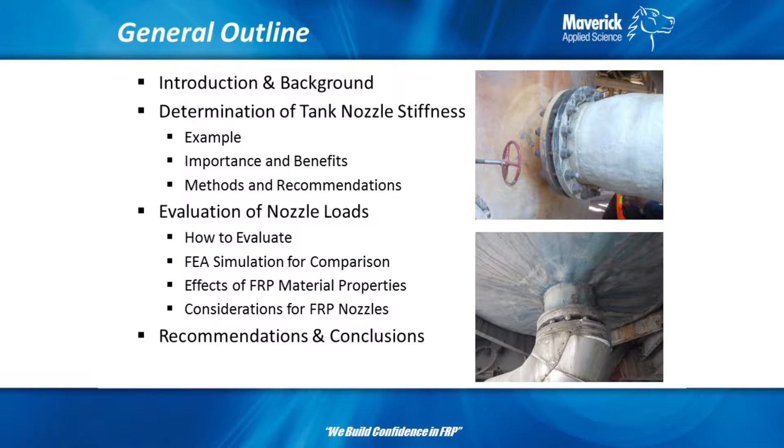So some of the background. Currently in RTP1, it has in the design section for sustained loads, it says the tank design must consider loads imposed by piping. Okay, well, that's good in theory. I can promise you it's poorly done in practice, chiefly because it is very rare that the tank manufacturer and the pipe manufacturer are the same person.

It does happen, but as I mentioned yesterday, basically the tank designer wants to go up to the end of their nozzle flange and say nothing is imposed on my tank. The piping designer goes up to the tank and says, I don't care about the tank, this is where my anchor point is. So there's a discontinuity there, just in how this is evaluated, because truthfully nothing is rigid. We'll talk a little bit about that as we go on.

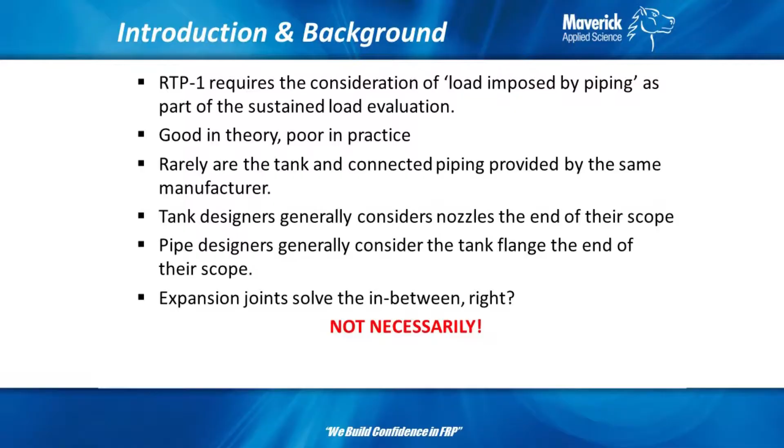You know, the common misconception is, well, let's just put an expansion joint in there, right? That'll solve all the problem between the piping and the tank. And maybe, but not necessarily. So, like I said, RTP1 says you have to consider external loads imposed on your tank. Then there's also some fine print in RTP1 that says it's recommended for all connections to be isolated through flexible connections. So that's kind of their catch-all of saying, well, okay, we do have to consider external nozzle loads, but you should really use expansion joints so it alleviates the responsibility from them.

So to illustrate this issue with an example, I think this could be somewhat enlightening to help you understand the crux of the problem. General pipe stress example: so we're going to say this is your tank connection here, and this is just a typical rigid anchor support, and we're okay with calling this one rigid in this case. Just a support here, it's got a dead weight support with guide, so it's allowed to go that way, it can't go that way more than 1/8 of an inch.

So we're going to apply temperature and dead weight to this. So this is going to want to grow this way, this is going to want to grow this way, and what's happening at those connections? So we're going to examine it with a couple different assumptions.

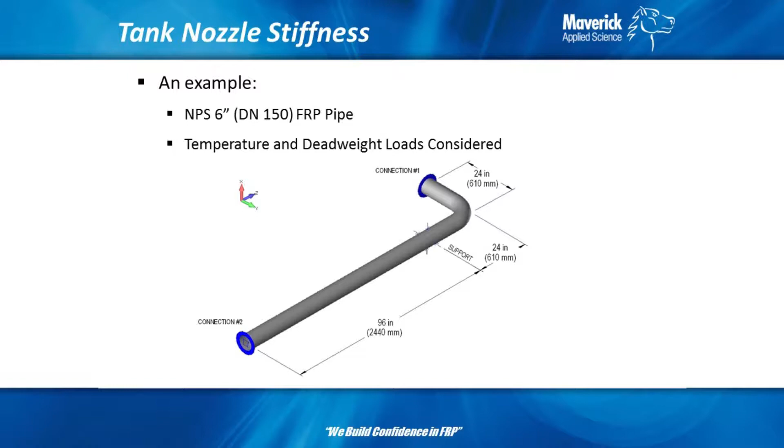So, first assumption, if we assume this is completely rigid, which is something in the order of 10 to the 10th magnitude of pound per inch, or inch-pound per inch if it was a moment, in the rotational direction. So when we analyze just this section with this rigid assumption, it's pretty bound up.

So with a high stiffness, we have a moment of over 3,000 foot-pounds. If you give that to a tank manufacturer, they're going to laugh at you and say that's impossible. The pipe stress alone is almost 5,000 psi, which is overstressed in the pipe. Just like I said, it's extremely bound up.

So if somebody is looking at this in isolation, the pipe analyst doesn't care what the tank looks like. It could be 20-foot diameter, it could be 2-foot diameter, they don't really care. The solution to this problem would probably be to put an expansion joint in.

Okay, well that's all well and good. Expansion joints are sometimes seen as a kind of a catch-all problem. Rob mentioned it yesterday about if you have some misalignments, throw an expansion joint in there. So expansion joints, they may seem somewhat simple.

I hope Rob, he tried to explain it a little bit yesterday too. They definitely require different consideration because basically you're breaking your pipe in half, so now you need extra supports in here. You have pressure thrust issues, not to mention the reliability issues of just leak points.

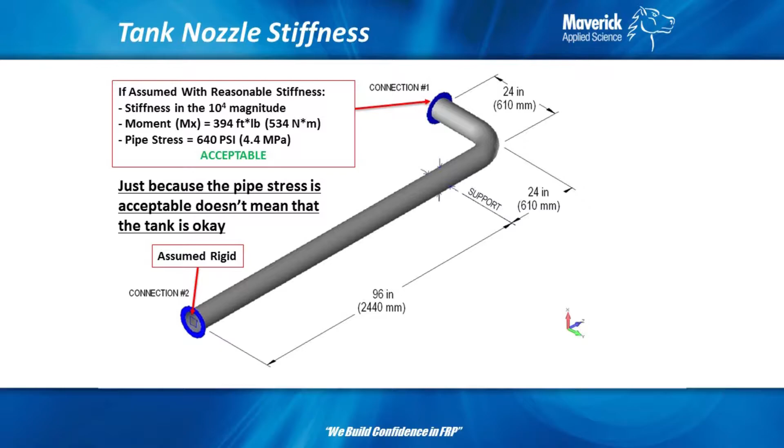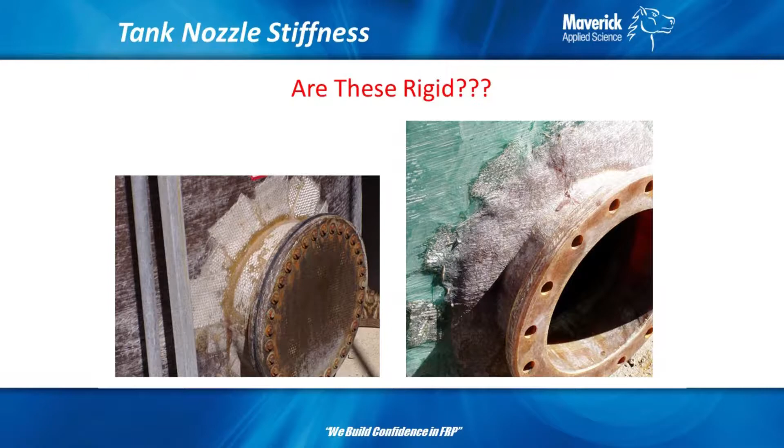So, is it fair to assume that these tank nozzles are completely rigid? There's a number of different factors that go into this. You have tank diameter, which plays a big factor, nozzle diameter, reinforcement, thickness of tank, and probably the biggest thing that I'm going to highlight today is the material of construction being FRP. It's not isotropic, you have different material properties in different directions, which has significant influence.

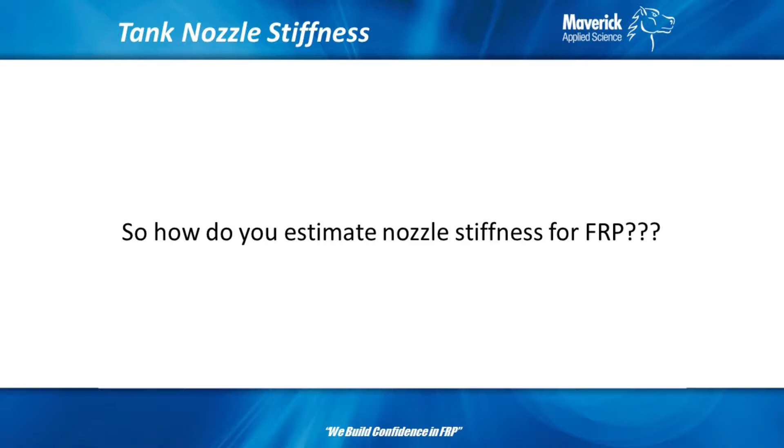Okay, so that's all well and good. So how do you estimate the nozzle stiffness? How do you get to that 10 to the 4th magnitude of stiffness? Currently there's a couple different ways.

Well, primarily you're going to look at WRC 297. That's Welding Research Council document 297. This is very old, as you'll see on one of the next slides. There's a curve that's just kind of handwritten, extremely old, not even a digital copy really. But they determined curves, generic curves, through their testing to determine the stiffness factors. There's limited applicability because they only did a certain amount of curves and then you have to interpolate or extrapolate, which is extremely dangerous in its own right.

They're tough to read, and the biggest thing is they're developed for steel. So that's, like I said, an isotropic material. We are not an isotropic material. Even type 1 and type 2 laminates, they're kind of quasi-isotropic. I'm not going to get into that, but they're not exactly homogeneous isotropic materials.

The other method of analysis that's a little more accurate is to do FEA on it. So time consuming, I have in parentheses there. Basically time consuming means, yeah, it's probably going to cost you a little bit more than you might think it should cost to determine tank nozzle stiffness.

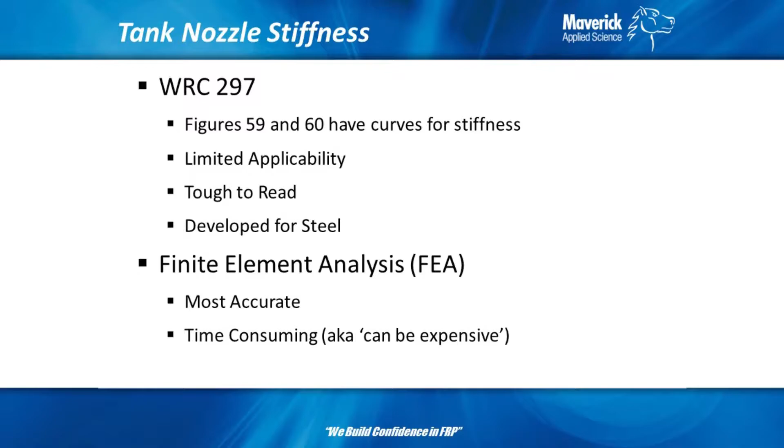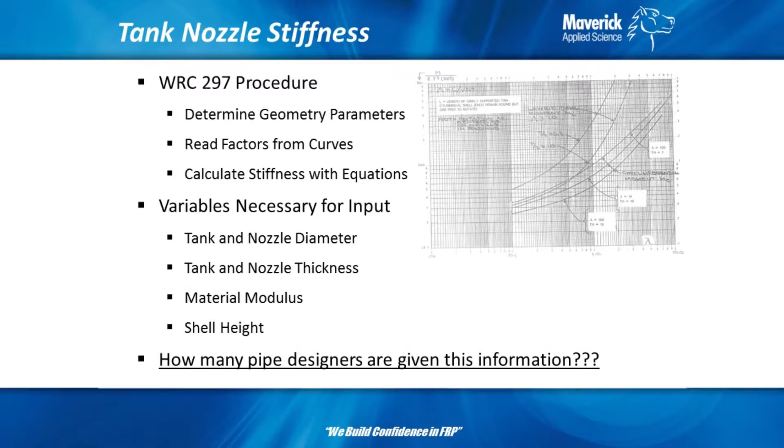The things you need to determine these geometry parameters: tank nozzle diameter, tank nozzle thickness, material modulus, shell height, where the nozzle is located in the shell. Well, how many pipe designers do you know that are given this information? I don't know too many. So unless you're doing the tank design and the piping design, it's a black hole. You're not going to get this information unless you specifically ask for it.

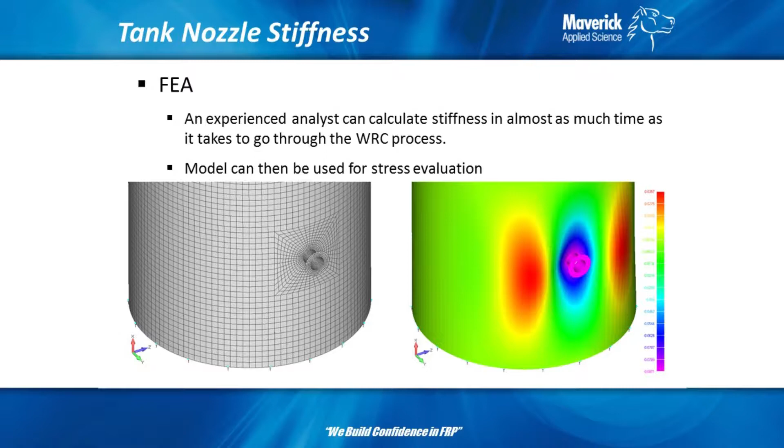So here would be an FEA example of something we've done, or we would do, to determine nozzle stiffness instead of using WRC, especially when you're dealing with an FRP material. To be honest, an experienced analyst can figure out stiffness in just about as much time as it takes to go through the whole WRC process. It's not that onerous. This is not a complicated model to figure this out. And the upside of that is the model can also be used for the stress evaluation that we'll talk about later in the presentation.

So what we did, we wanted to see how good the WRC approach actually was. So we did a comparison of FEA and WRC, and this was just assuming steel material. We wanted to see how close the curves actually were. We stayed within the parameters of reading the curves, so we knew there's no misinterpretation of the curves, to see how the numbers shook out.

And you can see it's fairly reasonable, -3 to -10%. Basically that means the WRC assumptions are underestimating the stiffness. Underestimation of stiffness means more flexible, means lower nozzle load, so that could actually be unconservative. Now in the longitudinal direction, you have a little bit more variance of up to 24%.

Now I'm here to kind of tell you that the order of magnitude is more important than the exact number. So 10 to the 4, somewhere in that range, is more important than knowing it's 50,000 pounds per inch or 40,000 pounds per inch. So these percentage differences, to me, they get you close enough.

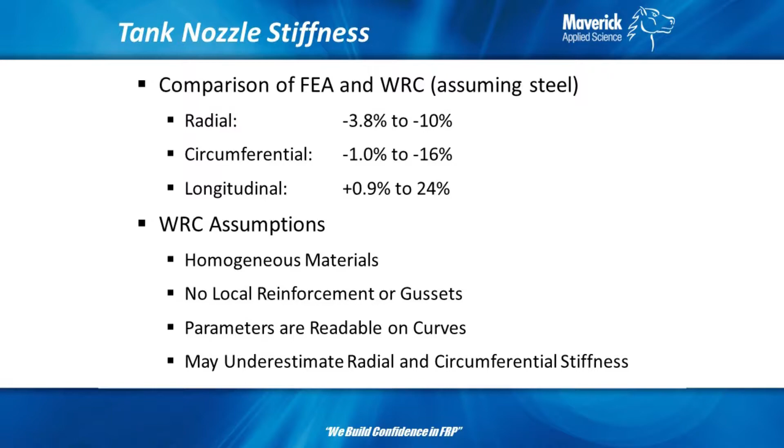Now again, the WRC assumptions: homogeneous material, there's no local reinforcement or gussets on those curves. Parameters are readable on the curves, so that's the assumption that whatever your tank nozzle diameter is fits on those curves, or else you're kind of up a creek. And like I said, it may underestimate the radial and circumferential stiffness.

So what would we recommend if you're using WRC? Well, like I said, more flexible means lower load. So we would recommend to do calculations to get you the maximum stiffness. So that's things using maximum thickness of the tank, the nozzle, max properties, use the nozzle OD instead of the nozzle ID, so you can over-predict the stiffness.

So I've been talking a little bit about filament wound, so let me introduce this. We talked in several presentations yesterday about filament wound tanks, where you have axial direction glass and you have hoop direction glass, and you bias that hoop direction glass to whatever optimizes your design. So in a tank, you're going to have more hoop stiffness than axial stiffness.

Well, that just throws a wrench in the whole isotropic assumption. So the stiffer something is, the more load it carries. So the hoop direction is going to carry more load, so it kind of distorts the curves a little bit.

So if you were doing an FRP nozzle, trying to calculate the stiffness, we would recommend you divide by the elastic modulus, basically whatever you're using to read the curves, the isotropic elastic modulus, and then you just multiply by the effective modulus between the hoop and the axial direction, and that kind of gets you pretty close.

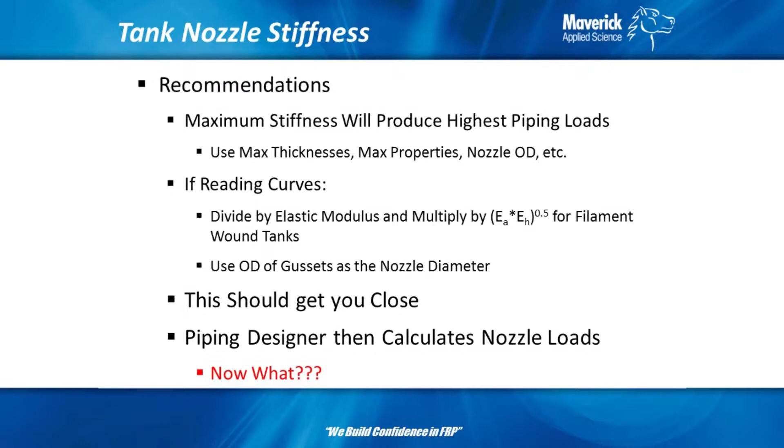We'd also recommend use the OD of any gussets. So on small diameter nozzles, 4-inch and less, they're going to be gusseted. So say a 4-inch nozzle that has a 10-inch diameter repad, the gussets are going to go all the way up to the repad. So in effect, that's a 10-inch nozzle that you're evaluating. So like I said, this should get you close, and then the piping designer calculates the loads.

So your tank manufacturer should be supplying the stiffnesses on nozzles of importance. So say at a pump connection, you would ask, what's the stiffness of those nozzles providing the stiffness? Some people want to say give me the allowable nozzle loads. That's kind of a mixed bag. We'll talk more in detail about why there's some variance in that a little bit later, but it's going to be very conservative if you just tell your tank manufacturer to give me allowable nozzle loads.

It's a more optimized design to say, give me the stiffness, the pipe designer will do the analysis, give you the loads back into the tank designer's hands to design the repad.

Okay, so enough with stiffness. Let's talk about how we actually evaluate those nozzle loads. So you got the stiffness, you did the pipe stress, you got your loads on your tank connection. So what do we do for nozzle load evaluation?

The important loads to consider are the radial load, straight in, and your bending moments in longitudinal and circumferential. There are 3 other directions: lateral this way, vertical force that way, just shear forces, and then torsion on the nozzle. Now those are fairly stiff, so we kind of ignore those, and you would probably just say those are rigid in the analysis, but those are not going to cause a great deal of stress.

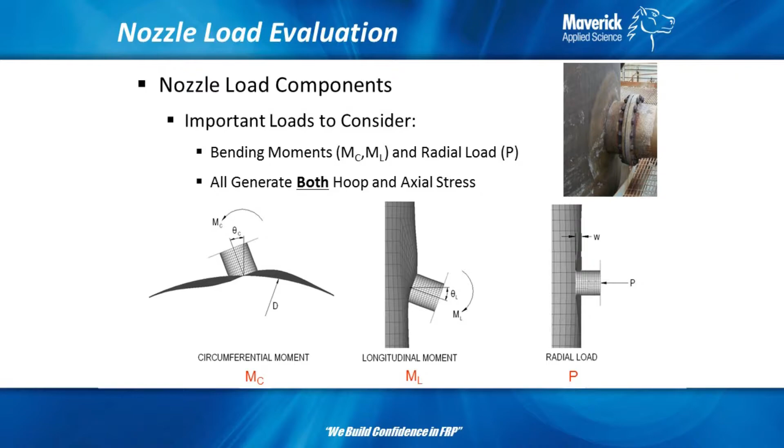Important to note that all of those loads generate both hoop and axial stress, so it's not like you're just bending this here and it's only causing stress in the hoop direction. Bending this nozzle here, rotating it there, is going to cause hoop stress, and it's also going to cause axial stress. They all have influences on one another.

So current ways to evaluate loads in industry, and not just FRP: WRC 107, 297, 537, talk a little bit about those. Bednar's pressure vessel design handbook, ISO or EN 13121, they all kind of share the same approach. That's all kind of based on the WRC approach, or you can do FEA. This is where having that model I was talking about earlier comes into play. So you have that model ready, you can apply the loads and see what repad you need to do.

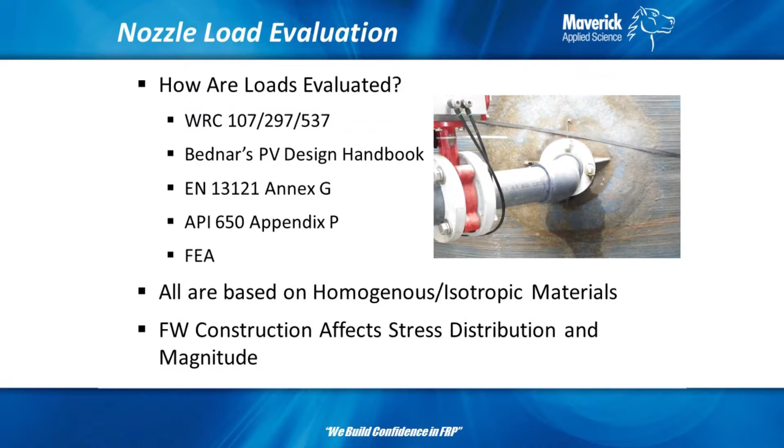All of those approaches are based on homogeneous - beat this with a dead horse, just so you understand - they're all based on isotropic. Everything in FRP world comes from steel. Our flange design comes from steel, and we just adapt it. Well, we have to make some changes, modifications, to make sure we're appropriately considering the unique nature of FRP construction. And the biggest thing is filament wound construction affects the stress distribution and the magnitude. We'll go into a little bit here on the upcoming slides.

So a former colleague of mine, he was tasked with doing a research project on this, and he spent countless hours looking into this. And what he ended up doing is built, I don't know how many FEA models, somewhere over 300, I think. Vessels diameter 6 foot to 16 foot. We wanted to get a reasonable range of vessel diameters. Nozzle diameters between 6 inch and 48 inch.

We chose 6 inch as the lowest and not 2, because what I was telling you with the gussets, a 2 inch basically turns into an 8 inch. So we want to do our evaluation irrespective of gussets and just say it's a 6 inch nozzle. Various thicknesses to see their influences.

And one of the bigger assumptions is we place the nozzle at the mid-height. If you put your nozzle closer to your flat bottom knuckle, well, that's going to be more stiff. If it's near a rib, it's more stiff. We just needed to isolate those concerns and just say it's in the middle of the shell. We don't want to look at any other influences that might distort our results.

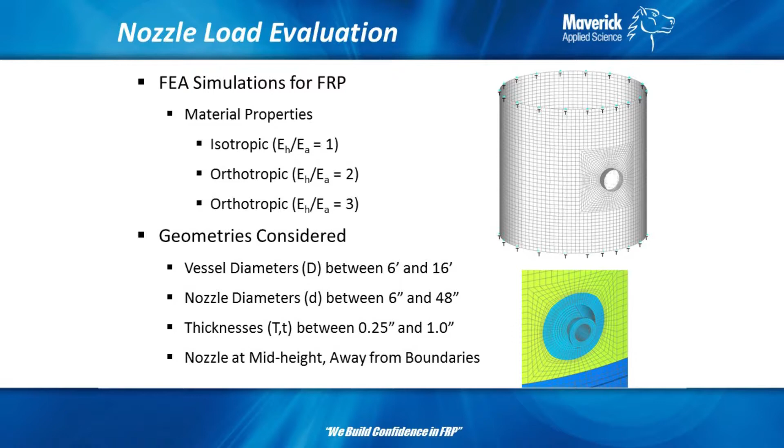We looked at isotropic material properties and quasi-isotropic, so type 1 or type 2, where you have the same modulus in the hoop and axial direction. Orthotropic, getting into filament wound, where you have a bias of a 2-to-1 hoop to axial ratio, and then a higher bias of a 3-to-1 hoop to axial ratio.

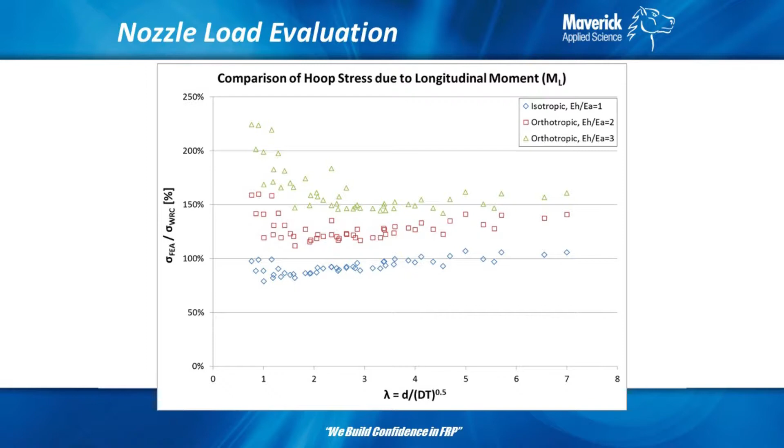Okay, and then you go to your 2-to-1 hoop to axial ratio. We're getting a little bit higher, where here you have some over 150%. That means the actual stress is 50% higher than the WRC would tell you it actually is. Okay, now you get into the 3-to-1 heavily biased, which I would say is not that abnormal, so this isn't out of the realm of possibility. You're over 200, it's called 225% stress. So that is significant. So we need to figure out a way to bring that down.

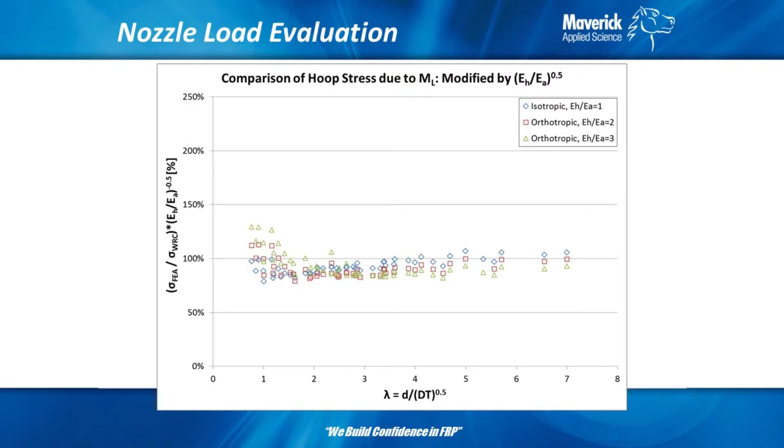So same curve, comparison to hoop stress due to longitudinal moment, but we modify it by another factor, which has to do with the hoop to axial modulus ratio. So we do that, we multiply that, or actually it's dividing by that ratio to normalize it, and now everything's around 100%. So that tells you there's something to that hoop to axial modulus ratio.

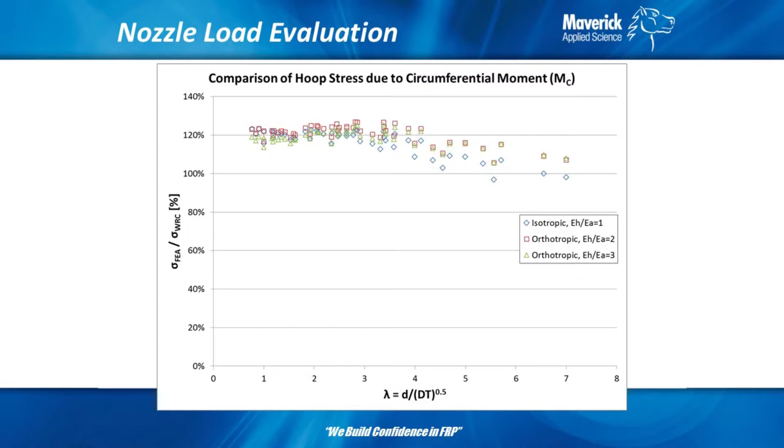Just putting all these graphs together, the reason why is because they're all hoop stress. They're not independent of each other. So all of these kind of add together to know your actual total magnitude of stress.

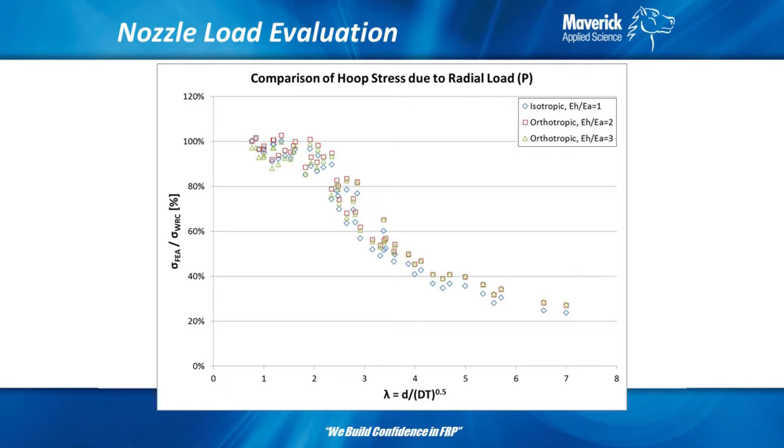And the last thing, the other assumption is about the stress distribution around the nozzle. So the max hoop stress due to the longitudinal moment is affected mostly by the filament wound construction. Hopefully you saw that in the curves where you had the heavily biased 3-to-1 hoop to axial ratio cause the most stress.

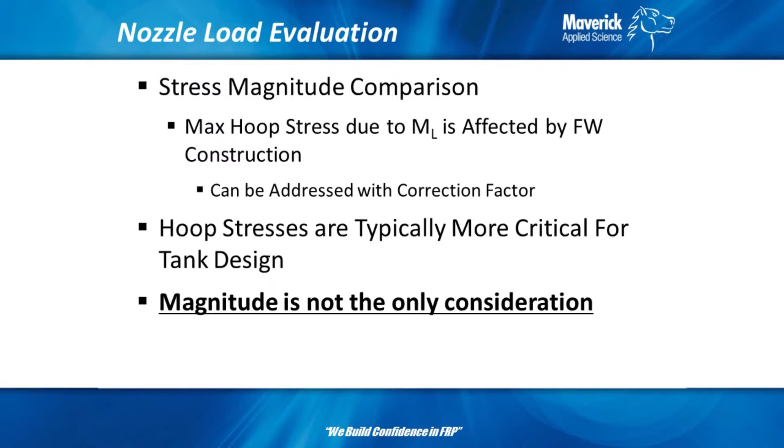Well, hoop stress is usually what the tank design is optimized for. Axial stress—these tanks are usually just sitting there unless you have an internal pressure case which could cause axial stress or overturning. But for the most part, your hoop stress is governing, where you're sizing the shell thickness for that hoop stress, which means you don't have any more available strength. So any nozzle load here is just increasing the hoop stress, for which you don't really have any available strength left. Now, however, magnitude is not the only consideration.

The max stress due to radial load can actually be either, and it depends on the configuration. Now the WRC approach combines the stress due to circumferential moment plus the radial load, and then it combines the stress due to the longitudinal moment plus the radial load, but they're not all combined.

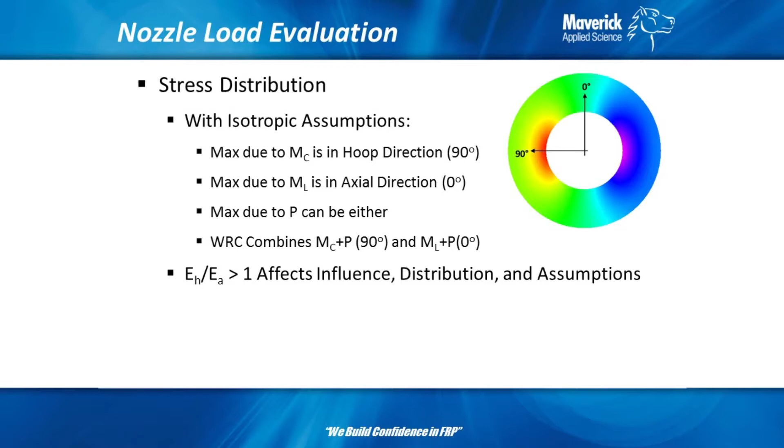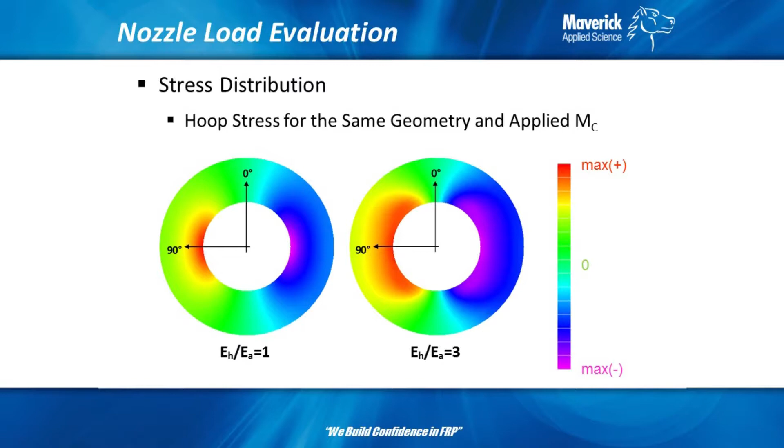Well, this is kind of okay for an isotropic material, but what happens when we look at our 3-to-1 ratio? Well, this contour is getting a lot closer to that zero direction. So that's telling you that circumferential moment is affecting that stress there, where we already know from the last slide that the longitudinal moment created the max stress there. So that means you have a lot of stress there from the longitudinal moment, plus whatever influence you have from here that's creeping over that you don't really see.

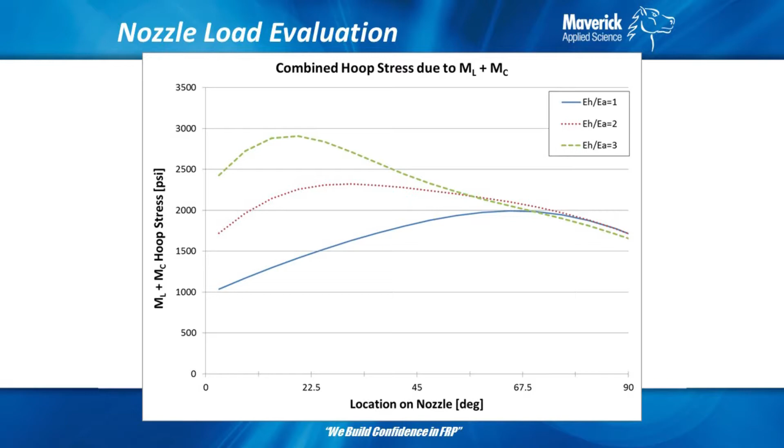So again, another curve I'm not going to dwell too much on. Basically this is saying, this is our isotropic assumption, 0 to 90, and it kind of tracks the stress around the nozzle there, around the circumference. Well, what happens when we have either a 2-to-1 or 3-to-1 ratio is our stress is way higher than the isotropic assumptions there. So there's an influence around the nozzle that we need to capture, that the WRC approaches don't, because they're just saying the stress due to circumferential moment plus radial, not all three together.

I'm not going to teach you how to do this—it's still kind of in development. There's no good standards out there, but I hope I have conveyed to you that there are resources out there that this can be done. So you don't have to say, well, I'm just going to believe the fabricator and we're just going to do expansion joints everywhere. But it's important to understand the limitations of WRC.

Talked a little bit about that—it's, again, isotropic material assumptions, there's a lot of curves. If you're outside of that curve, I wouldn't trust it. And obviously there's additional considerations necessary for FRP. I'm not going to read those bottom ones, we've kind of talked about those enough, other than saying we would recommend to add all 3 stress component loadings of your circumferential moment, longitudinal moment, and radial force instead of just isolating 2 of the 3.

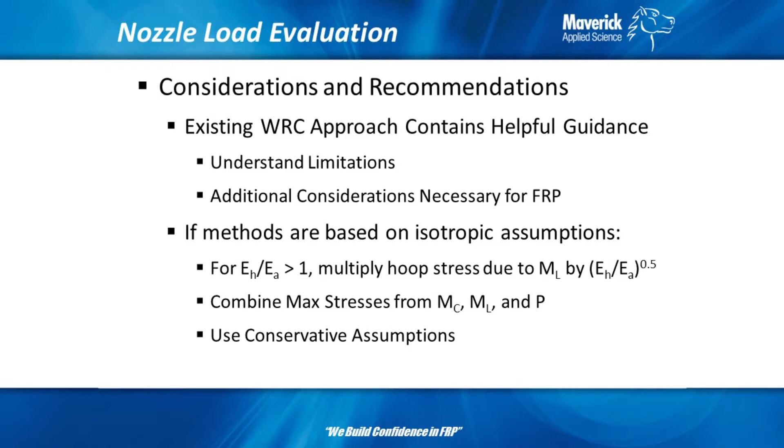So last slide, it was funny yesterday, I was talking about scrubbers not being able to be designed as a scrubber, it was just an atmospheric tank. So now I'm talking about tank nozzles. It could be a scrubber, it could be just an atmospheric storage tank. You can't design the tank nozzle without considering the piping loads. It's an iterative process, okay, yeah.

We talked about yesterday the RTP1 stamp, so it's going to be a little bit of a headache for tank designers, manufacturers to get on board with RTP1. There's going to be some learning curve associated with that. There will be a learning curve associated with this too.

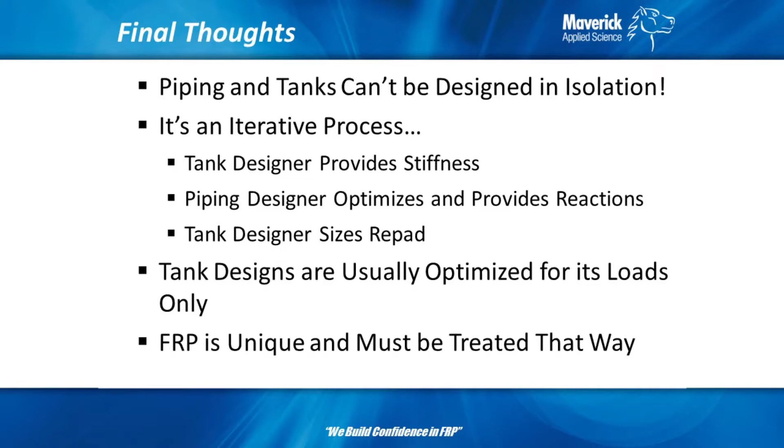If tank designers now have to provide their nozzle stiffness values with their submittal, that can go to the pipe stress guy, so he can put it in his pipe stress analysis. Then the pipe stress guy can get the reactions back to the tank designer, so they can size the repad appropriately.

And because, I've said it before, I'll say it again, the tank design is going to be optimized. They're trying to save as much money as possible, so they're only designing the shell thickness as thick as it needs to be. The reinforcement pad you see, the style A or style B that Jeff talked about yesterday, those are just to restore the cutout you took for the nozzle. So the repad on the tanks is again just optimized for pressure. No consideration for extra nozzle loadings.

So there is never zero nozzle loads. Even expansion joints have some pressure thrust that goes back to the nozzle. So zero is an impossible number. There's always some loads, it's just a matter of what the magnitude is.

You can see on some drawings where they have maximum allowable nozzle loads. Well, what good is that? If the piping designer assumes the tank connection is perfectly rigid, as we saw in that first pipe stress example, it's going to be impossible for them to get loads lower than 250 foot-pounds, or 250 for the radial force. In that pipe stress example, even our optimized design was something like 400 foot-pounds. You don't see those as acceptable to a tank designer, so they're going to have to add some more repad to that.